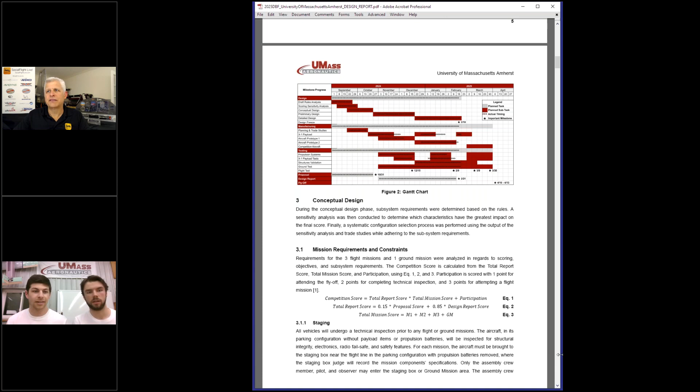Makes sense. Well, we don't want to go too much through this, but I do want people to see the course layout of what's actually happening here. Can you explain this loop?

Yeah, so if you can see, there's a runway down at the bottom, and you take off in either direction, depending on the direction of the wind during your flight. You then circle around and perform a 360-degree turn, and then come back and complete the lap, and that's considered one lap. The course is approximately 1,000 feet in length.

The straightaways are around 500 feet, so you can imagine that this is probably around a half-mile course. Our plane often flies 3 or more laps per mission, so you can imagine our flight distances are somewhere in the range of 1.5 to 3 or 4 miles, something around there.

Expanding upon that, this is how the competition works in terms of scoring. You have this design report, which is really proving our team and our design analysis and testing. But then you have this whole flight section, the flight course we're flying, and you get graded on how fast you can fly these laps, how many laps in a specified amount of time, and how much weight you can carry.

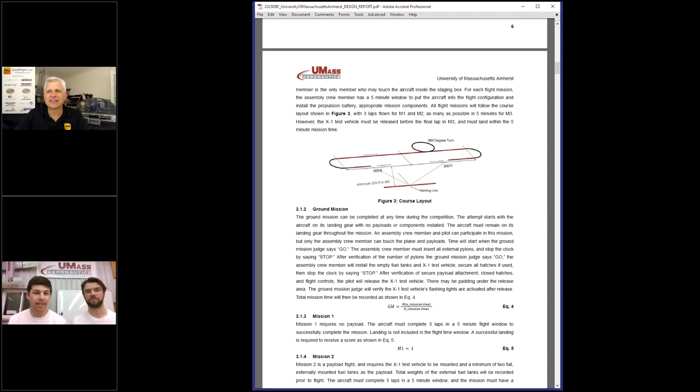Sure, so if you scroll down, I believe it's page 10. We've clearly looked at this enough. Yeah, two up, and you'll see this sensitivity study.

This is what we do very much in the beginning of the competition, but we're tweaking it throughout the season. You have these equations that tell you: you fly this many laps and this much weight, and you drop the glider in this position or this close to the landing zone, and here's how many points you get.

But if you make a plane that carries a ton of weight, it's going to fly really slow. And if you make a plane that goes really fast, maybe you can't carry as much weight, because now you're building a really light, streamlined plane without that big of a wing. So you have to balance these things, because if you're average at everything, you're actually not doing that well in competition, since your goal is to be really good in a lot of the missions.

Sometimes the strategy is to get really good in one mission and just try to minimize the losses on the other mission. So it's this whole trade-off of whether you want to be okay at everything or prioritize one without losing the other.

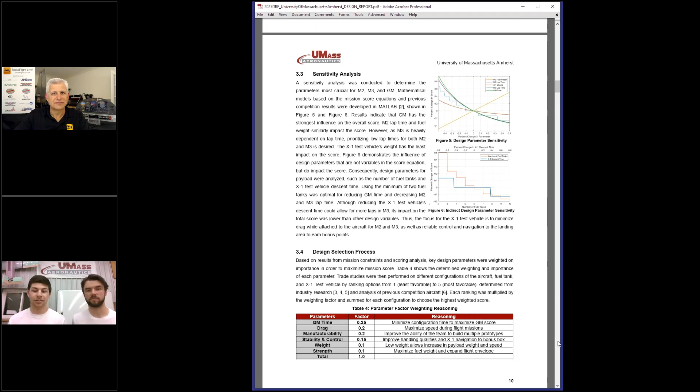And that's what these trade-off studies are doing, is we're trying to mesh some physics and mesh a little bit of just the equations, trying to figure out what's really possible.

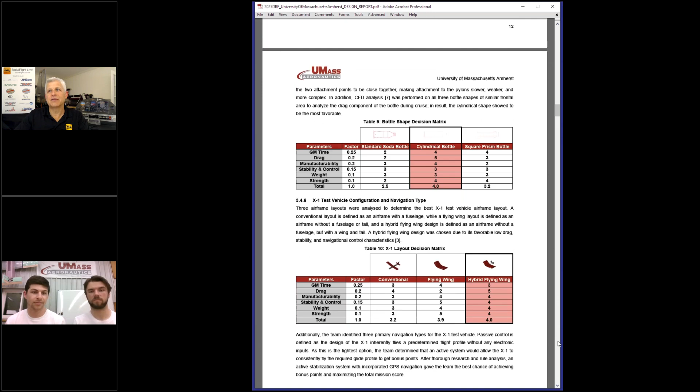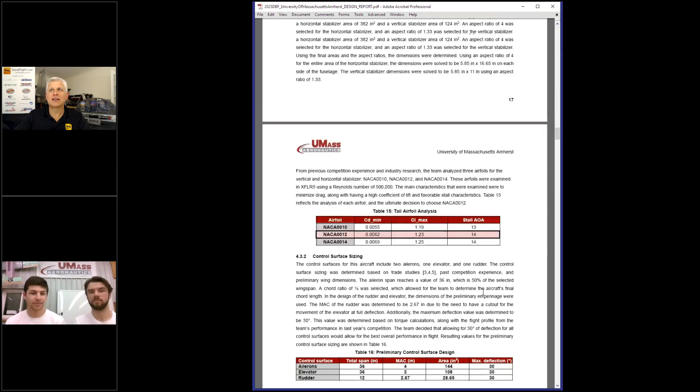And obviously you look at different ways that you could have built it, good ways that you could have done things differently, obviously not taking people through the whole thing. But this is really detailed work that you've done to come up to this. Tell me a little bit about that.

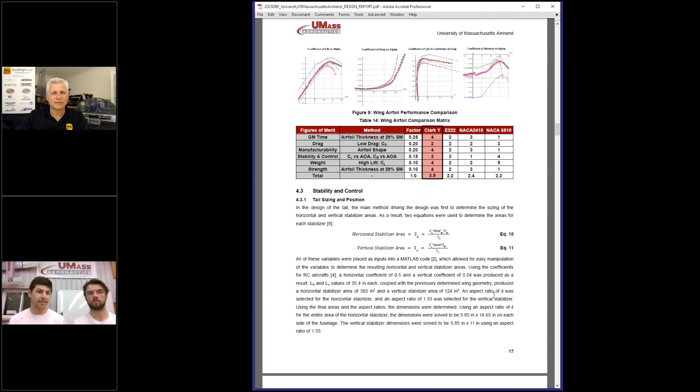Yeah, so that's one of our analyses that we do in the very beginning, which is trying to figure out, after we do our sensitivity study, okay, let's try to figure out how to build a wing. You got to start somewhere, there's a million options you can do. So what we did this year is we started by choosing an airfoil. What airfoil is going to best balance the properties that we want? You can kind of see the table at the bottom weighing the pros and cons of different aspects of the wing. And then on top, each line is a different airfoil, and we're trying to figure out its coefficient of lift and coefficient of drag and its efficiency and its stall characteristics. This is just a starting point to then expand upon wing sizing and geometry and things like that.

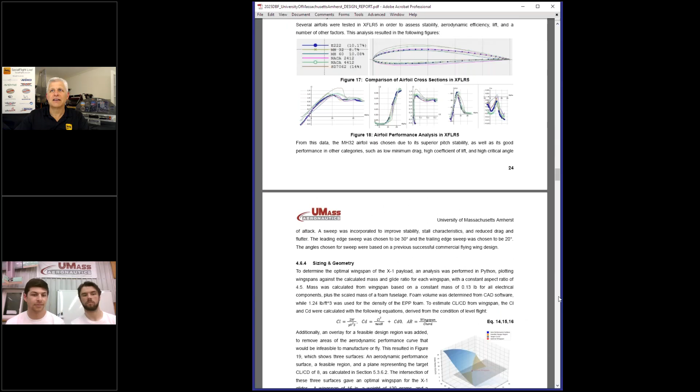Yeah, very cool things, and just really, really detailed work and analysis that you do. And that's that part of it. So then you get to the soda bottles. Tell me a little bit about this.

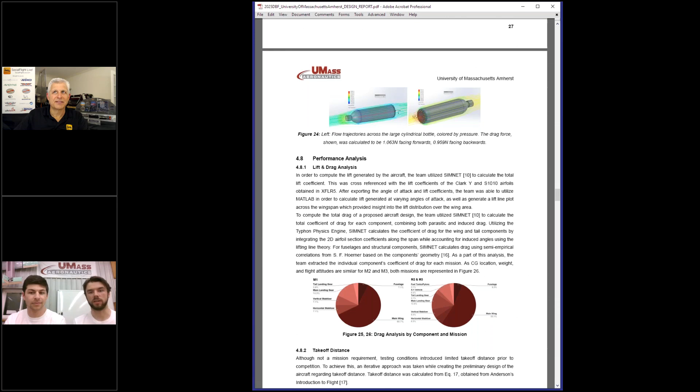Yeah, absolutely. So for your fuel tanks, you needed to use a commercially available bottle. So one of the evaluations we had to do was which bottles are the most aerodynamic, and should they be flying forwards or backwards? We ran some simulations on all sorts of brands - we got Dasani, Poland Springs, Smart Water, the whole shebang. We ended up settling on Smart Water as one of the most aerodynamic and volumetric bottles. And then we discovered that it's actually more aerodynamic to fly them backwards, with the bottom of the bottle into the airstream. Thanks to some of our simulation guys, we were able to find these things and really elevate our designs.

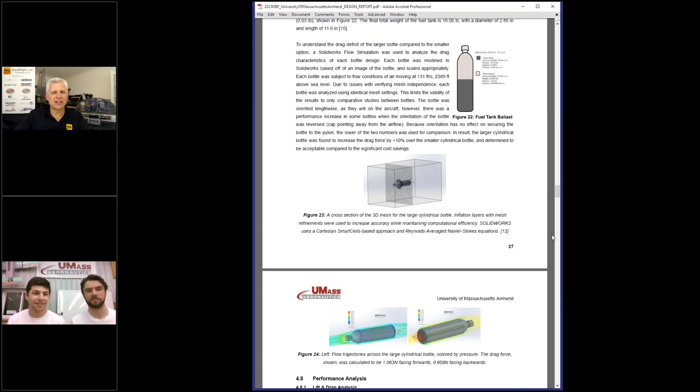I love that. So pilots should be drinking Smart Water from the bottom up. That's the lesson. Yep, exactly. If there is a lesson.

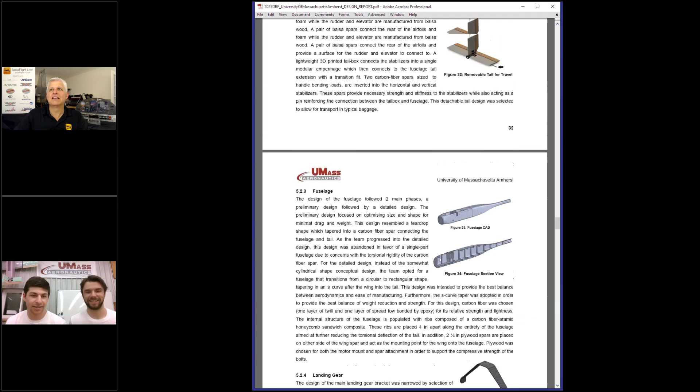So there's a lot of stuff here, as you can see, the way that you design things in the fuselage, landing gear, stress studies. You really learn how to do all these things that apply to regular aircraft.

And here's your glider. Tell me about the glider. Yeah, so we ended up pursuing an active navigation system. We deployed one of our sub teams to work towards a fully autonomous navigation system that features the electronics that Jake was describing - the magnetometers, the accelerometers - and attempts to establish an autonomous control method.

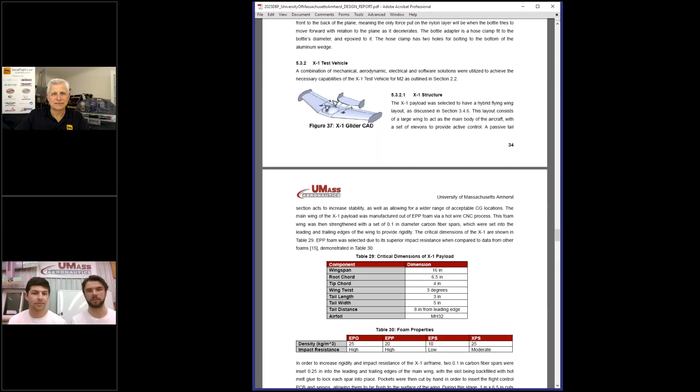And that was the electrical side of things. We then decided to pursue a flying wing type design for the aerodynamic structure, and that allowed us to achieve stable, maneuverable flight for our glider, so that we could enable that active control. Very cool, and we're going to show people images of that soon.

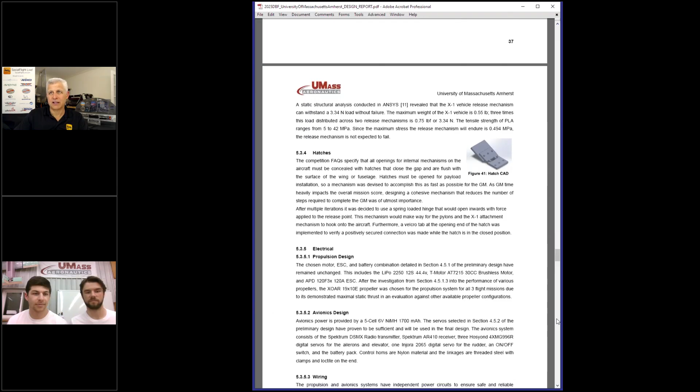But again, a lot more detail here in the report, and then you get into how you did systems and things like that. All right, so now we've got a little more graphics for people to see about how this all came together. Can you talk us through this?

Sure. So this is kind of the exciting part, and I actually have some things that I can show as well. As the team progressed, we were actually able to use better materials with better strength to weight ratios, and really start to pursue advanced ways of building aircraft, very similar to how some new aircraft are made now. So in the very beginning, years ago, 4 or 5 years ago, we were basically making normal balsa wood aircraft, and they're very great - they're light, they're fairly strong, but they're very brittle.

So if you ever get in a crash, or you touch it the wrong way, you've got to go get your CA glue and fix it up, and you're not getting any strength from that balsa wood. You're really getting the shape of the aircraft, so you have to put structures inside. So the next step is, okay, how can we make the structure of the plane, the shape of the plane, start to carry load?

That's where we start moving into composite materials, because now you can have the skin of the aircraft hold a lot of the load. You can have the airfoil shape of the tail hold a lot of the load, and now you can make a light aircraft be really, really strong.

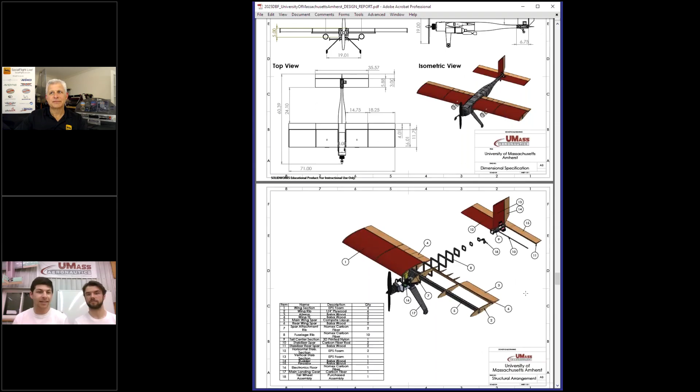Wow. So it's pretty cool stuff, and it's stuff you kind of dabble in in your classes, but you really get to apply and test it. So it's really fun.

Yeah, and I remember one of the things that was also fun watching, I got to see along the way at a couple visits things like you all of a sudden added all this weight. I want to be clear, that's a lot of weight in those fuel tank soda bottles or whatever, water bottles you had on the side. How much weight did you put on the wings?

Yeah, we were carrying 20 pounds of payload on a 6-foot wingspan this year. The plane itself was an additional 12 pounds. So we had a 32-pound combined strength, or wingtip strength test.

And I remember coming up during some of your development, I remember seeing you guys first put on, or early on, put on those weights, and then all of a sudden it's like, great, and then the landing gear splayed out. Oh yeah. There's a lot to work on.

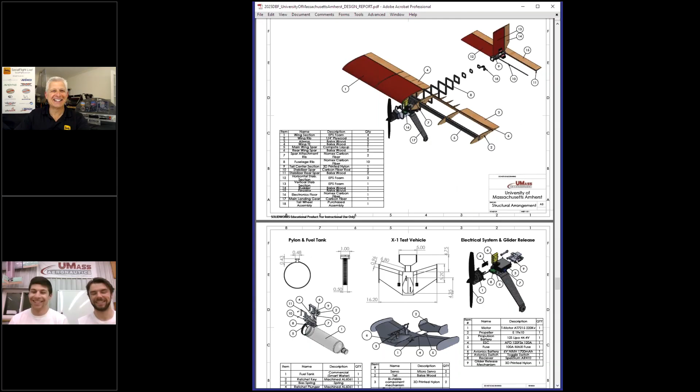Yeah, and I actually have one of those here. So we're making everything in-house, but again, we're competing against teams that have $200,000 budgets, and we're just building our team. So we're thankful for the sponsors we have and the support we get from the school, but we really have to think outside the box to be able to make composite parts like this.

So all our composite is— hold on, you skipped over what your budget is, because your budget from the first year to this year, you're still in single-digit thousands. Yes, we are. Yep.

So everything is on a budget, and to the extent of how do you make composite parts? Well, you usually need a vacuum to take out all that epoxy instead of just having a layer of epoxy on top, and also to hold some pretty complex geometries in place. You need a vacuum.

Vacuums are very expensive, and vacuum bags are very expensive. All our carbon fiber is expired carbon fiber from companies that were about to throw it in the dumpster, and our teammates who intern there just put it in their car instead.

For example, we made our fuselage. We made a 3D printed mold, taped the whole inside with Teflon tape, then put our carbon fiber in, put the epoxy in, and took a used trash bag and wrapped it around. You turn the pump on, but of course the trash bag rips, so you duct tape over that and try to get the best vacuum you can.

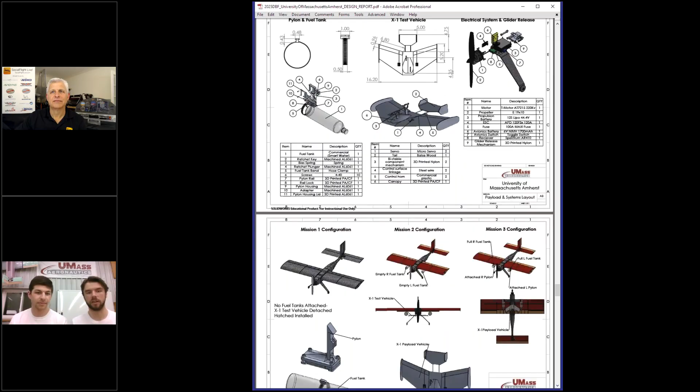We've got more in-depth drawings for some of our payloads. As you can see, there's a lot of CAD work that goes into the design of our aircraft. Each of these components gets hours and hours, sleepless nights of CAD time, and it really pays off—it allows us to have some of the most technically advanced mechanisms.

For example, our payload mechanisms featured a pylon design that was fully machined and designed by one of our members, and they were one of the fastest mechanisms at competition. It really shows what you can do with tools like CAD and some hard work and driven effort to achieve success against some of these high-performing teams.

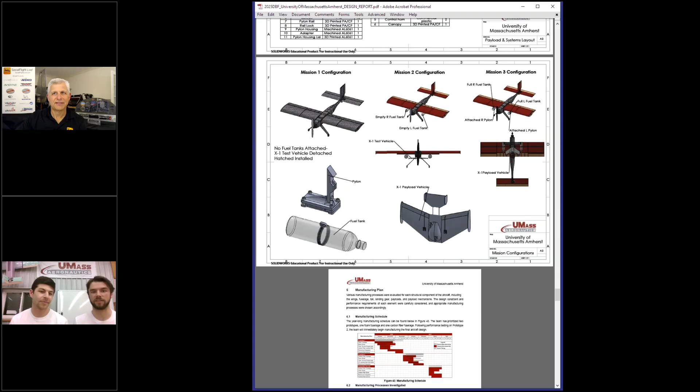One thing I'll add is these release mechanisms you see, like that little pylon on the middle left, and also what holds the X-1 vehicle. The ground mission this year required you to load everything into your aircraft as fast as possible.

You have to set a really high standard because all the other teams are trying to win that same mission. This is probably iteration number 60 at least, which is crazy. Everyone probably hated Nate and I because we kept saying, no, it has to be faster, it has to be faster. We ended up getting the whole plane assembled in 6.9 seconds.

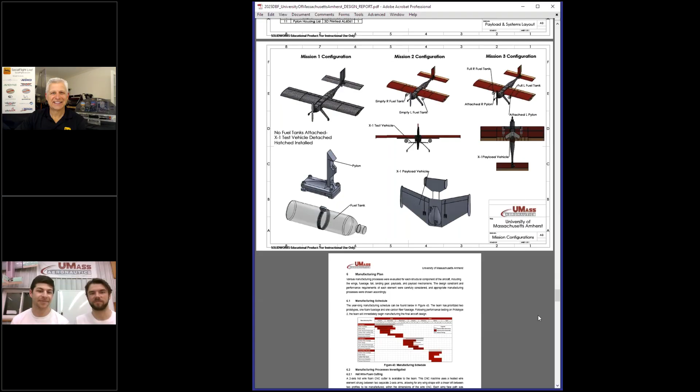After almost 60 iterations, we're probably going to just put it all in a big bucket of epoxy and throw it in the river, because we're so done with all the iterations. But it's really fun, and it's all about thinking outside the box. A lot of these parts were made by freshmen and sophomores.

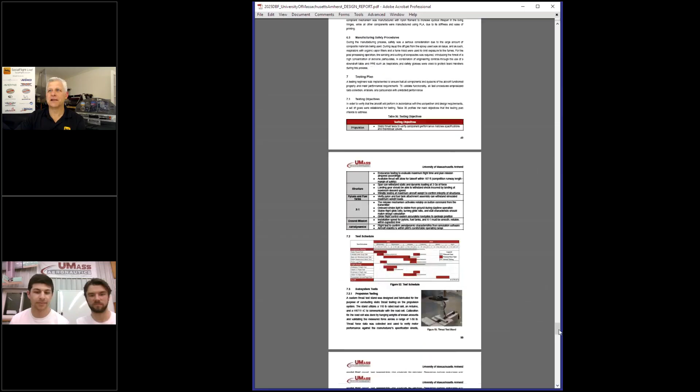That's absolutely awesome, and again there's a lot more detail in this report. You guys did a great job with this. I do want to show some of the photos.

It's a great group of people. I want to make sure... Obviously, we have only you two with us tonight, but this isn't possible without this amazing group of young adults.

We actually have 36 people on the team, and only 7 are graduating, so we have 29 people that are going to stay with the team and continue building it once we go. We're really proud of that. These students range anywhere from first year in college all the way to seniors getting ready to graduate, and we really try to distribute the workload. As freshmen, we try to have them own projects, because that's the only way to learn. You can take a SolidWorks class or a CAD class online, but it's only going to take 60 iterations to really understand it.

Also, all these people on the team want to pursue something with aviation or aeronautical engineering to some capacity. They came to UMass to get a really strong background in electrical or mechanical, but it's teams like this that let you kind of get into those industries. And we actually have a lot of people on the team.

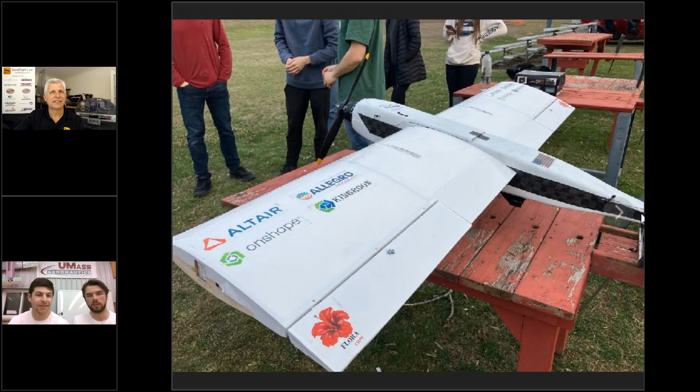All right, so tell me what happened. Let's tell everybody how each of the flights went, and be honest. Absolutely. So we got off to a great start. On our first day, we passed tech inspection on our first try with minimal hiccups. We were the fastest team through tech inspection because we had all our ducks in a row and our plane was ready for flight. On the second day, we successfully flew our first mission in the morning, and that was a really big boost. We were off to the races, off to a really good start.